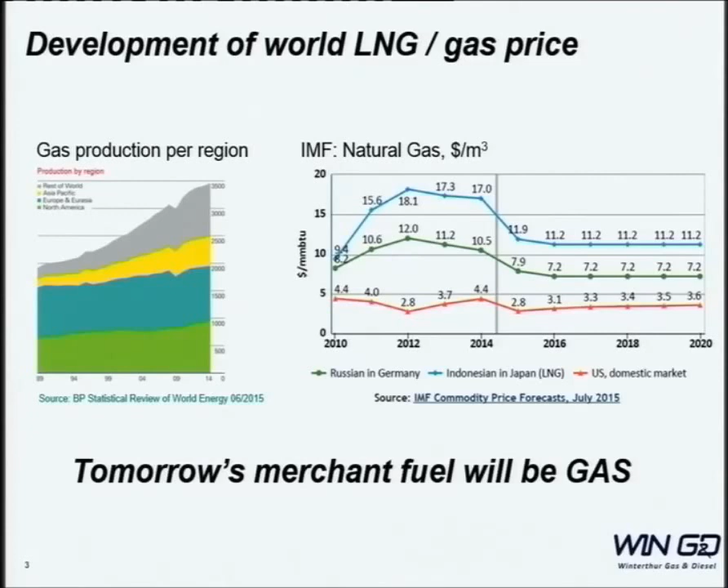To be in the right position to supply engines for this fuel, we started already in 1972, as you can see here, developing the first dual fuel gas engines, and it lasted until 2013, when we introduced the latest two-stroke gas engine to the market, passing through some developments on four-stroke engines, and coming to the conclusion that for our dual fuel two-stroke engine, the low pressure concept, as applied to four-stroke engines, is the one which will be the standard in the future.

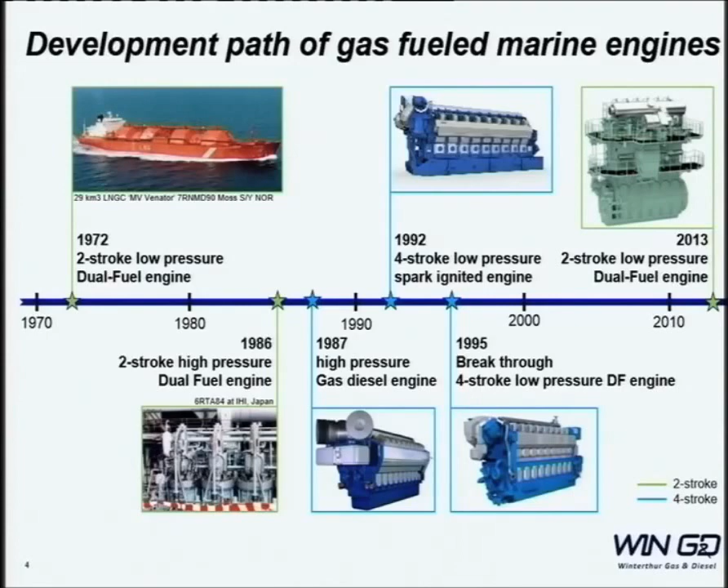And so we switch from the diesel concept, when we run on liquid fuel, to the Otto concept. Mr. Otto you know well from cars and four-stroke engines, realizing a low pressure dual fuel engine. I hope now my movie is working. Fortunately, I checked it during the lunch break.

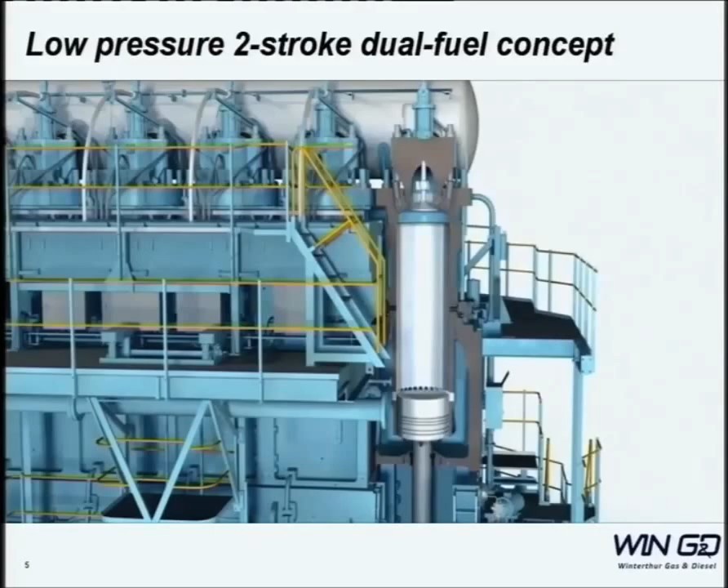You see here the principle. It's quite easy to understand. We inject the gas in mid-stroke, and then the piston, when it moves up, compresses the gas. The beauty of this system is that the gas is injected at maximum 12 bar at high loads, and at lower loads it's also lower. So you can reduce consumption on the gas pumps, and then it's ignited with some pilot fuel.

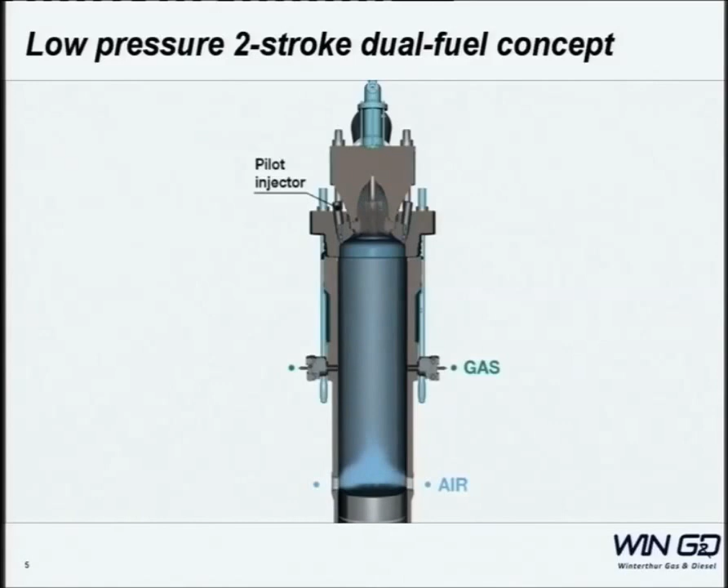And just to give you a short idea of the key technology for this gas Otto concept, there are four major components. It's the micropilot system, which I just mentioned. It's an injector which injects the pilot fuel. Then it's ignited via a small pre-chamber. Nowadays we're still testing it, not for normal operation, but for reducing the pilot fuel consumption. And now we've reached a consumption lower than 1% on that pilot fuel.

The pre-chamber technology I just mentioned before. Then there's the gas admission system. You've seen that we inject the gas on two sides of the cylinder liner, which is a different gas admission valve than for four-stroke. It's a completely separate development for two-stroke engines. And last but not least, the engine control automation system, which offers safe and stable operation, especially when it comes to pre-ignition and knocking sensing.

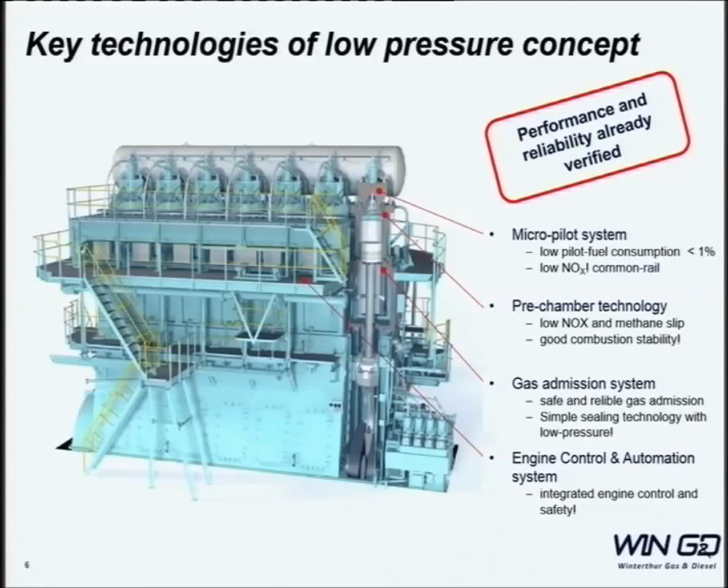If there's anything happening on gas, it trips to diesel, so you go on diesel mode and you run on liquid. And when you start up the engine, which is by law, by legislation, you have to start the engine with the liquid. Even when the engine is idling, you can directly switch over to gas and then run the engine on gas.

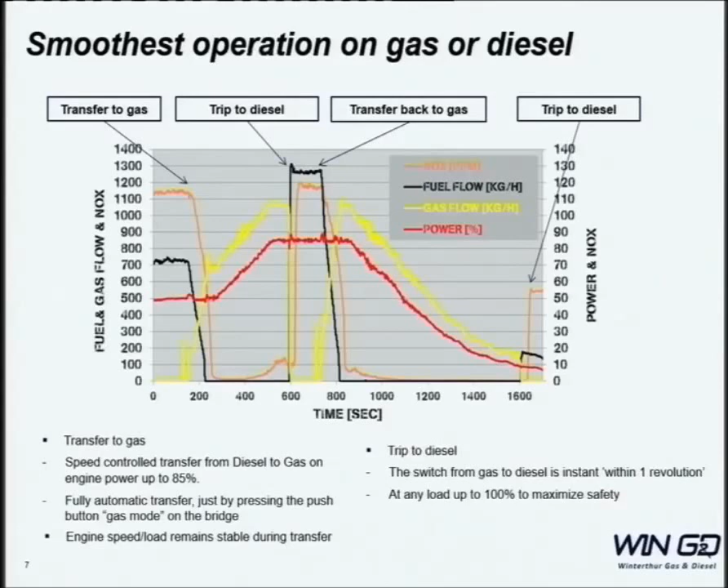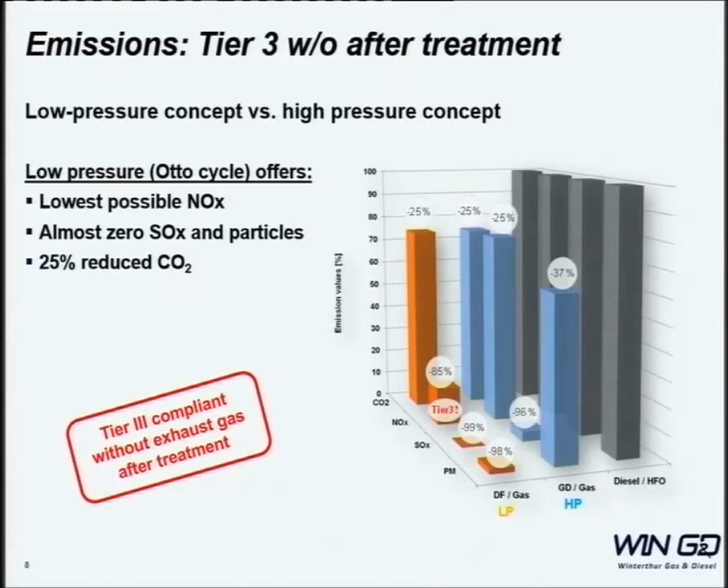What's the beauty of it? The beauty is emissions. We had that already with the SCR and the scrubber presentation. With the low pressure system, so the Otto cycle, this engine is able to operate in Tier 3 conditions without any exhaust gas after treatment. You see here, lowest possible NOx on gas, almost zero SOx and particles, and 25% reduced CO2. So this system is perfect for Tier 3 operation.

As I said before, we tested and we're still testing, and we have also the engines already now running. We'll talk about references a little bit later. But just that you know, we have a test engine in Trieste, and it's just a 50-bore engine. We're doing on a regular basis customer events. The next one is on the 12th of November. So if somebody wants to see the engine, please let me know, or Stefano. And we're happy to arrange a visit, or also to perform an engine profile for you, that you can see the engine running, and I can prove my words that you don't feel if it's running on gas or on diesel.

We also have a test engine in Japan with Aioi, Diesel United, a 72-bore engine, which was really a breakthrough in the Japanese market, especially for the LNG carriers there. And this was also set up to prove that large bore engines with 72 centimeters bore are able to run on gas. With this engine, we went really low pressure on low loads on gas. 5 to 6% was possible to run that engine on gas.

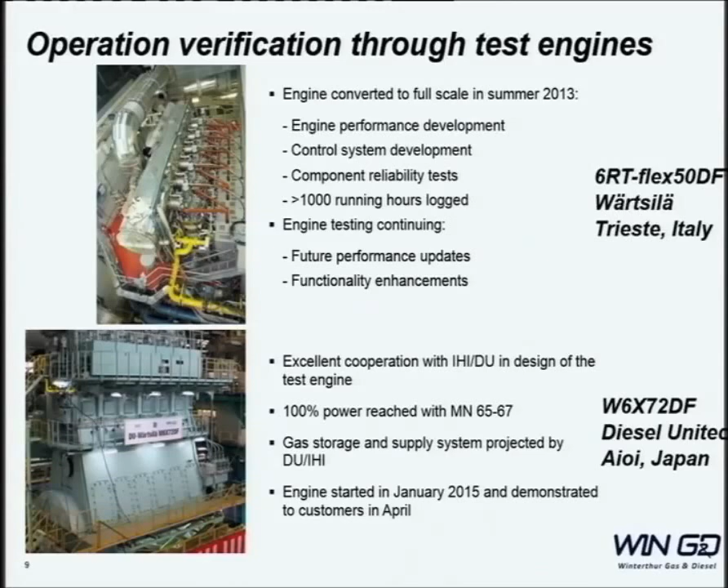As I promised, some references. We have, as I said before, based our development of the two-stroke low-pressure engine on the massive experience we have from our dear colleagues from Wärtsilä. They're having more than 1,300 low-pressure four-stroke engines in the market, reaching cumulated running hours of 12 million. So that's impressive, and I would say the low-pressure system is the industry standard. And if you take into consideration that we started 2013 to market this two-stroke engine, we have already 33 orders booked, and the first one will be delivered end of this year, and the next one, the 72-bore, Q1 next year.

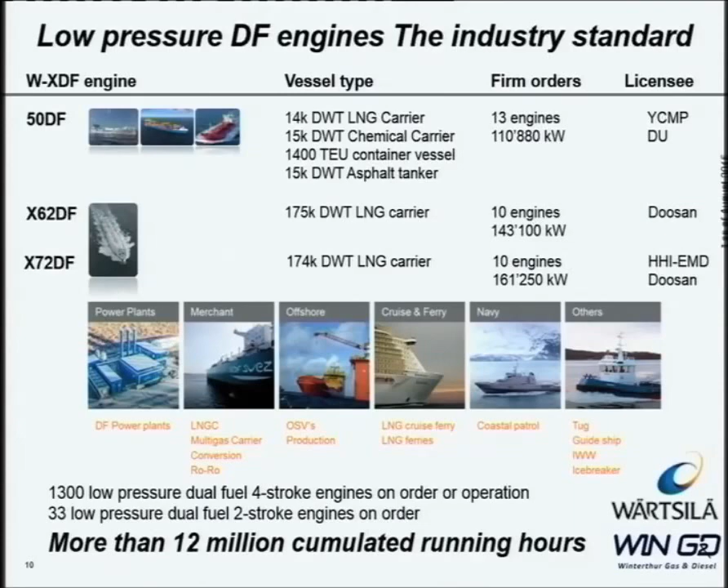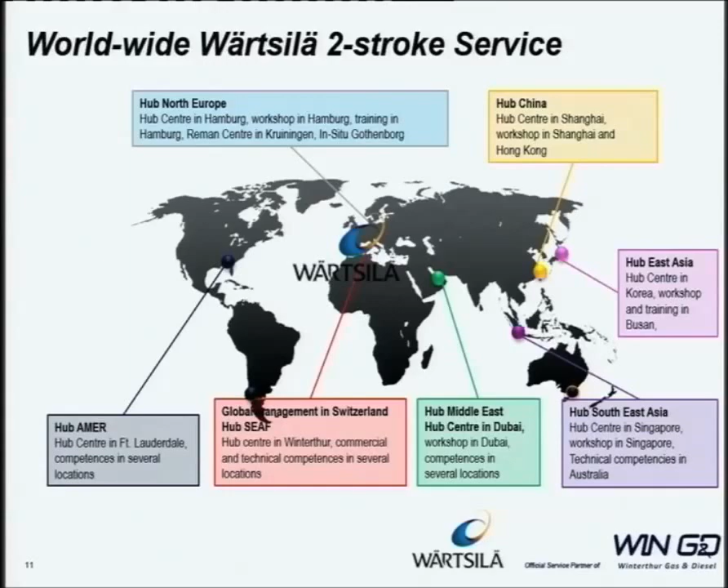Coming to the cooperation with Wärtsilä, as I said, it's a joint venture, but also on the service side, service stays with Wärtsilä. And Wärtsilä already set up a dedicated two-stroke service in Switzerland, which is the headquarters. So we can rely on the Wärtsilä network for spare parts and services, but also this service is separated for two-stroke engines, so that there's no shortage of service engineers when it comes to a two-stroke issue.

Concluding, I would say the low-pressure dual-fuel system is the industry standard based on the experience we have with four-stroke engines. More than these 1,300 engines in the market. We already passed the shop test, and we have the first engines coming into operation. And I think that this technology is really the future technology for all the ECA zone operations.

I still have 3 minutes left, not even 3 minutes and 50 seconds, so I would like to pass over to Stefano De Marco because he squeezed in 2 slides. I'm sorry for that, but I promised him to have a word.

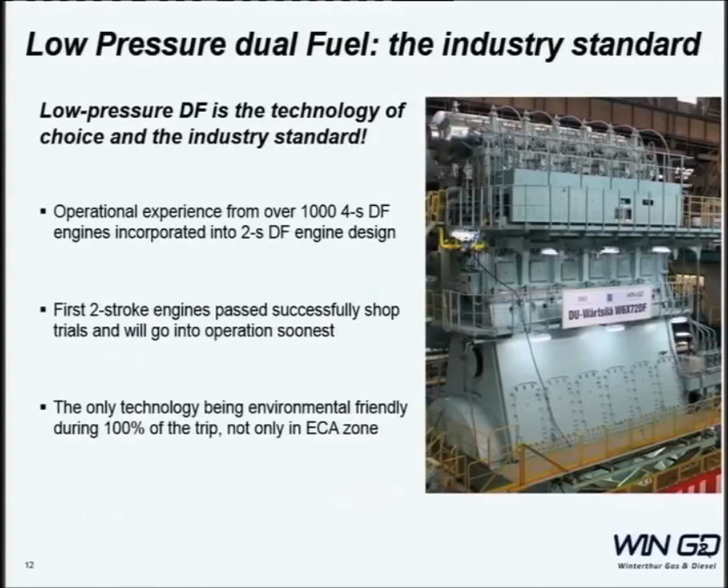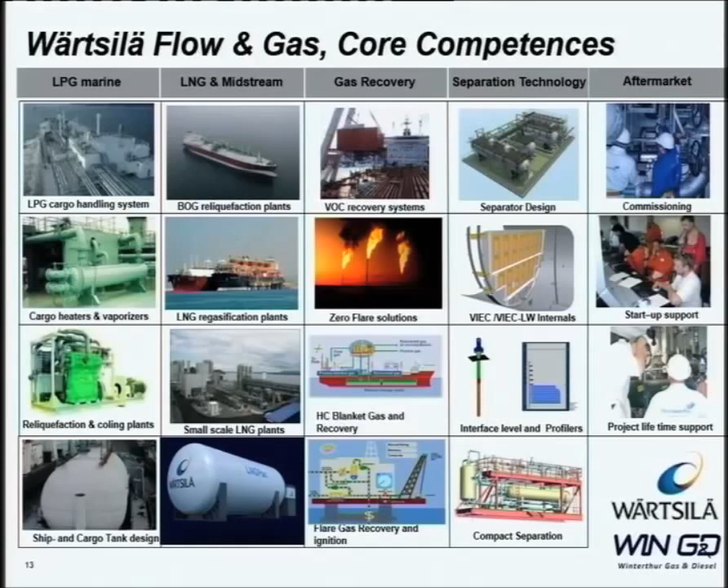Hello everyone, good evening. Just to tell you that as a company together, Wärtsilä and WinGD, we are not, let me say, offering technology devoted to the engine itself, but we are trying to support the customer on all that concerns gas management. So from the bunkering, from the management of the LNG on the vessel, the storage, to the supply towards the engine itself.

But really concluding, we are, as a company, not only supplying equipment. What we are trying to give to our customer is expertise. We can rely on more than 12 million running hours and several projects that we have studied, analyzed, participated in with major classification societies. And we hope now to carry on also in this arena in the near future. And I want to close quoting what Mr. Francioni was telling. It can be for economical or environmental reasons. The important thing is that the customer can count on our support.